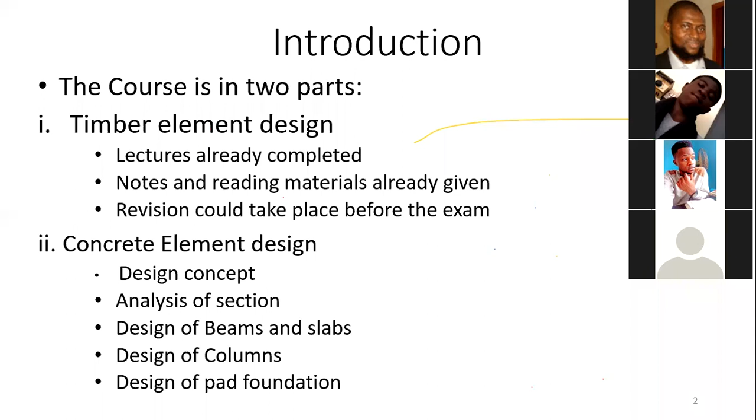So, concrete as construction material. You will have been seeing what concrete is. Concrete is a composite material. It is composed of aggregates. So aggregates are sand and granite. And then you also have binder. That is cement that we normally have, be it Dangote cement or Lafarge cement or Pure Chem.

The essence of this composite material, which is cement, or could also be supplementary cementitious material, SCM. They are most often than not added to cement, either to reduce the clinker content, but in any way, it doesn't affect the properties of concrete.

So then another constituent of concrete is water. If you add cement to sand and granite, there is no magic that can happen. They will never get bound. But adding water to it will make a reaction occur between cement and water, and that is what we call hydration reaction. And this hydration reaction will produce a product that we call calcium silicate hydrate. The calcium silicate is the concrete that you see, the artificial stone that we use to build nearly all the structures that we find in our environment today.

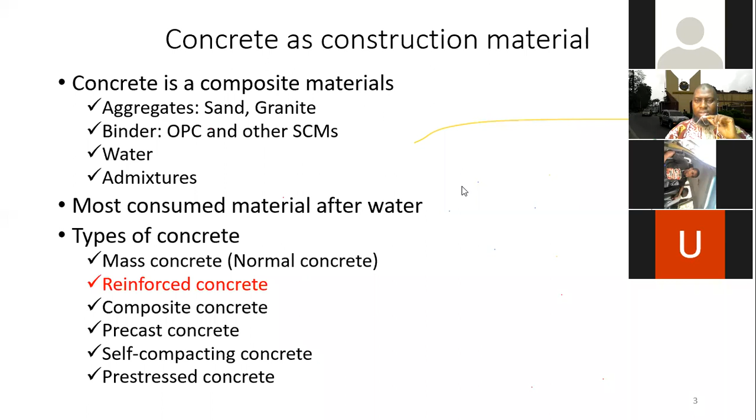Now, somebody is marking. So, yes, Mr. Mustafa Raji, what is the problem again?

Sir, for that composite concrete, I did not get the explanation. I'm saying composite concrete, you have a steel section being used along with concrete. At times, if we have timber used along with concrete, it is a composite. You have a concrete that is being used with a steel section.

If you look at where my cursor is now, you can see some steel there. These are called steel reinforcing bars. It's different from a steel section. What they normally use for the column and for the roof are called steel sections. So if you use concrete along with a steel section, then you say it's a composite concrete. Is that okay?

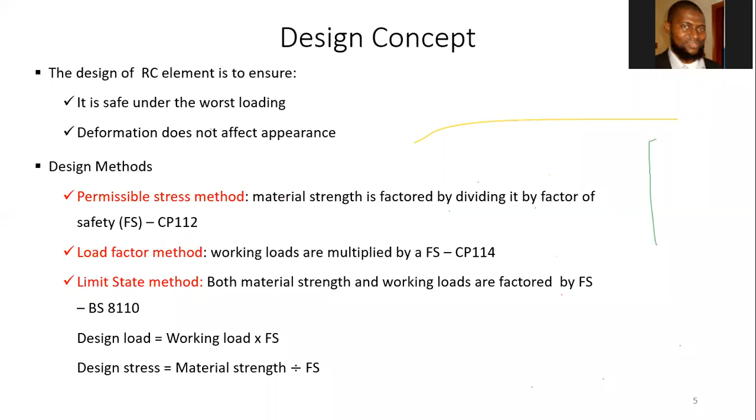So that is why you assume that the material strength you are going to use is a bit lower, so that you'll be able to have at least some level of confidence that your material will not be stretched beyond its capacity. So you divide the material strength by factor of safety.

Now, limit state design. Limit state design has an aim. You will see most of this information about limit state design as introduction in BS 8110. I will encourage you to take your BS 8110 at your leisure time, read the introduction to limit state design further, and you will also get more information from the reference material I have already given you.

The aim is to achieve acceptable probabilities that a structure will not become unfit for its intended use. You want a structure to be used maybe as residential, or a dancing hall, or an auditorium. And it is expected that this structure will be in use for some years. So the aim of limit state design is that the structure must not fail before its lifetime, and the structure must not be unfit for its intended usage.

For instance, you cannot design a structure to be used as a hall, and at the time, we now say people should not use it as a hall again because of the fear of failure. It means you have defeated the aim of the design initially. We have two major types of limit states. When you say limit, it means you have a boundary above which nothing should be.

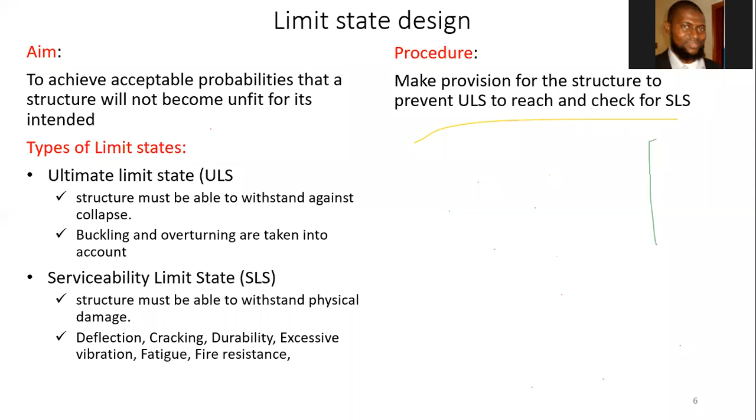And then once that is there, you also check whether the serviceability limit state will be exceeded or not. You will say a structure is well designed if both the ultimate limit state and serviceability limit state are not reached before the lifespan of the structure.

Marty, are you hearing me? Yes, sir. Okay. Yes, sir.

Material stress and design load. Because we are using material for our design, your material for your structural element will be exposed to usage. You as human beings, the students in a classroom for instance, are a source of load to that structure. So there is need to estimate load, and at the same time, there is need to know the strength of your materials. We have what we call the characteristic strength.

For the characteristic strength, most often than not, steel is produced in industry. They have guidelines, they have specifications for which they produce these steel bars. So as designer or engineer, you don't have control over what should be the reinforcing steel that you will use. It is what you see in the market that you will design towards.

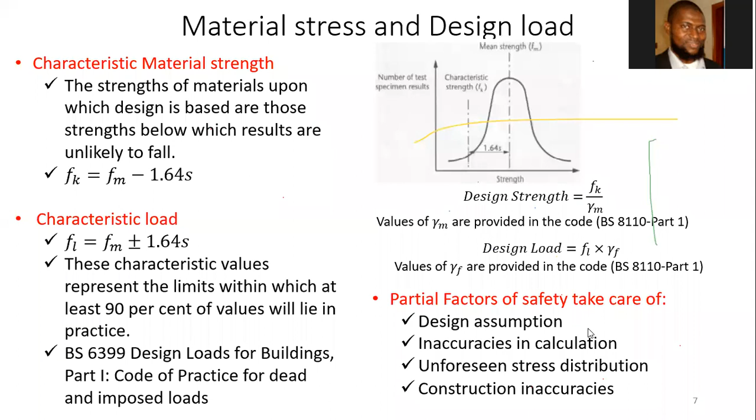And what then matters is that because you have made an assumption, you simplify the stress distribution, whatever small error that you didn't take care of as a result of your assumption will be taken care of by a factor of safety. Also, construction inaccuracies. These are the reasons why factors of safety are used.

Now, we have different combinations of loadings that you may have on a structure. You can have a dead load and imposed load. Imposed loads are loads that are not permanent. The earth and water, that is when you have, for instance, a wall, maybe a retaining wall to retain some amount of

Can't hear you, sir. He is mute. Somebody... Yeah. Okay.

Now, you will find this table, BS 8110 Table 2.1. For the ultimate limit state, the factor for dead load, that is loads that are permanent in your structure, expected to be permanent, is taken to be 1.4. Loads that are not permanent, like furniture, human beings, and anything else expected to be moved, are called imposed load.

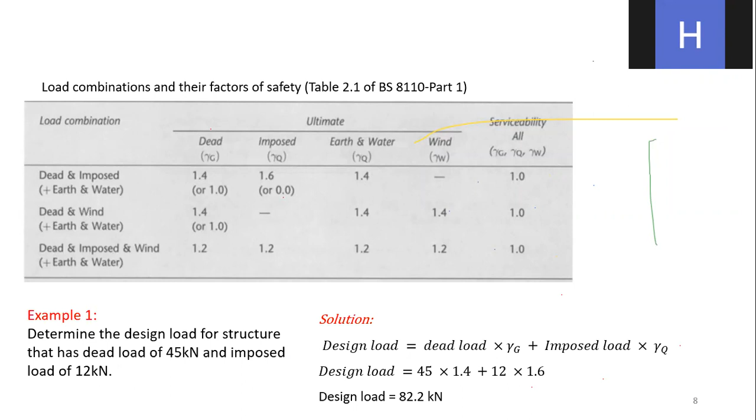Then if you have dead load and wind load, because you have different types of loading, it can be dead, it can be imposed, it can be wind. If you have a combination of dead and imposed, you use 1.4 for dead, 1.6 for imposed under ultimate limit state. But under serviceability limit state, you use 1 for both dead and imposed. But for a combination of dead and wind load, for instance, maybe in a high-rise building where the effect of wind load is likely to be noticed.

Who is Bello Alima? Why are you marking this? I think I will need to mute the annotation. Okay. Okay, yes, I've disabled them.

Now, here, if you have the three combined together, dead, imposed and wind, instead of using 1.4 for dead, you will use 1.2. For the imposed, you will use 1.2. If there is earth and water, you use 1.2. For the wind, you use 1.2. But for serviceability limit state, the load that you have is still the same. You only factor it by 1.

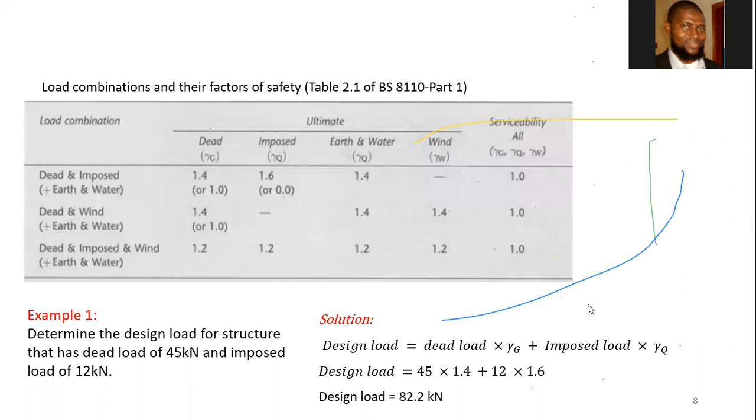This 45 kilonewton is your working load which you have estimated, and this is also a working load which you have estimated. Because there may be some mistakes while estimating this load, those mistakes are taken care of by this factor of safety. So at the end of the day, you have a design load of 82.2 kilonewton. So this is how the design load of a structure is estimated.

Yes, I have another example here. We want to see how we can use all the three methods. This question says determine the cross-sectional area of a mild steel that supports a total dead load of 5 kilonewton and an imposed load of 3 kilonewton.

The characteristic yield stress of the mild steel. This is the mild steel that you buy in the market. Though in the Nigerian market, you can't find 250 Newton per millimeter squared anymore. The strength of material you find in the Nigerian market these days is 460, or it may be lower.

So we want to carry out the calculation using the load factor method of design, and we use a load factor of 1.6, for instance. A permissible stress design with a factor of 1.6. In the permissible stress design, how do we determine the stress of the material then? You will divide the characteristic yield stress by the factor of safety.

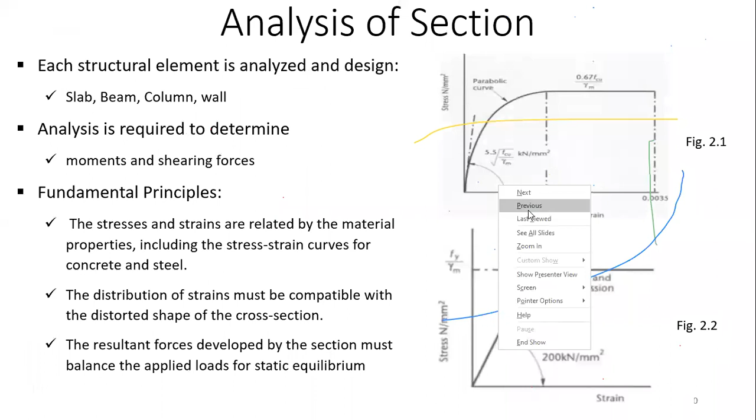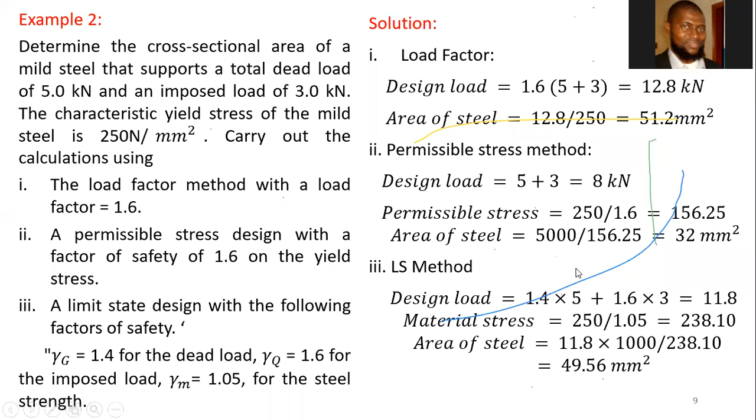Sir, will you be correcting this typo? Yes, okay. Sorry, here you're supposed to use 8 kilonewton. Are you with me? You're supposed to use 8 kilonewton. That will give you 8,000. Then definitely this will not be 32 millimeters squared again. This will be corrected. I'm still going to send the PowerPoint presentation and put it on the LMS for you to go through. Is that okay? Yes, sir. So it shows that you are following up. That's good.

Now, this is a bit of a stress diagram. This class is supposed to end by 9. We have spent 1 hour already. So anyway. You are muted, sir. Yeah, he knows, I think.

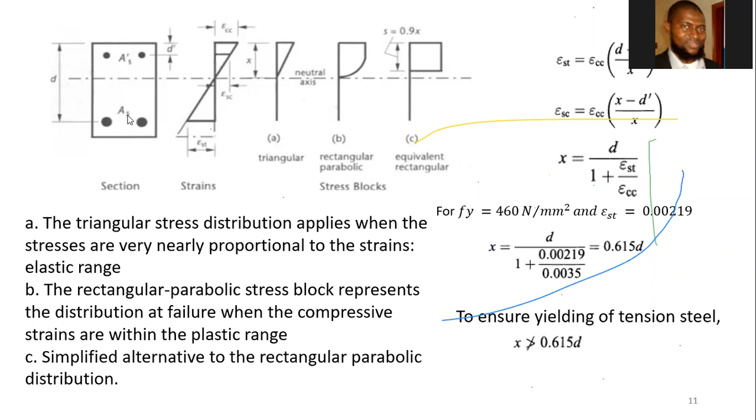The reinforcement we put here resists compression along with the concrete, while the reinforcement at the bottom resists tension. You can see the notation for compression steel, A prime s, and then for tension steel is not having